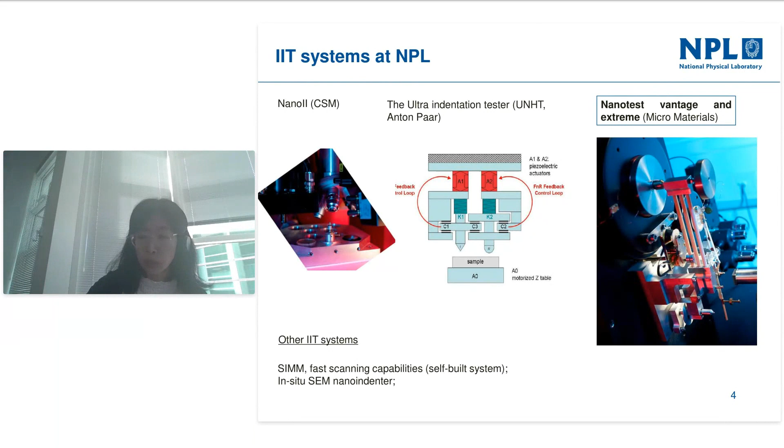As for today's focus, the NanoTest system for the Xtreme, the NanoTest Xtreme with multi-head, we will focus on this system. With the above setup, the instrumented indentation test research activities in NPL include the following two parts.

So the second part is to develop new techniques, such as exploring new applications of the instrumented indentation test regarding industrial needs. We carry out research work with direct links with industry and universities, and with access to the ICM suite and microstructure characterization, we test a set of materials and formats of specimen for the instrumented indentation test.

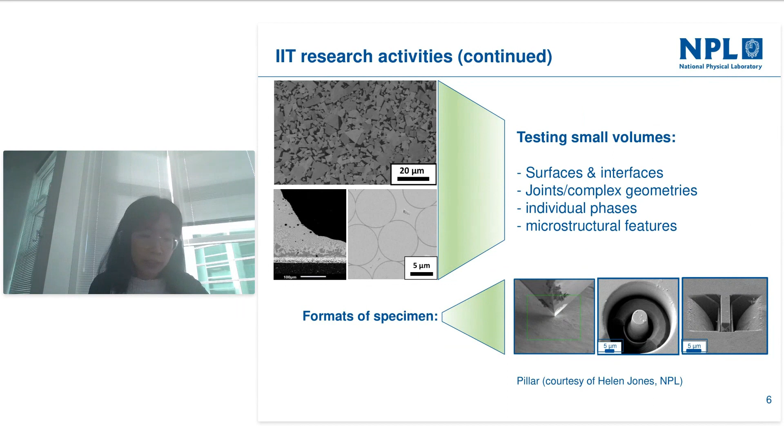And for the detailed setup, for instance, a high spatial resolution of about 1 nanometer with nano positional control, and a wide range of temperature from cryogenic to high temperature of about 1000 degrees C that we are testing at the moment. It gives us options from atmospheric pressure to high vacuum, and also inert atmosphere with backfill of argon or nitrogen. We have tried routine tests for hardness and modulus, and are also exploring new test capabilities, for instance yield strength, fracture behavior of materials and creep properties.

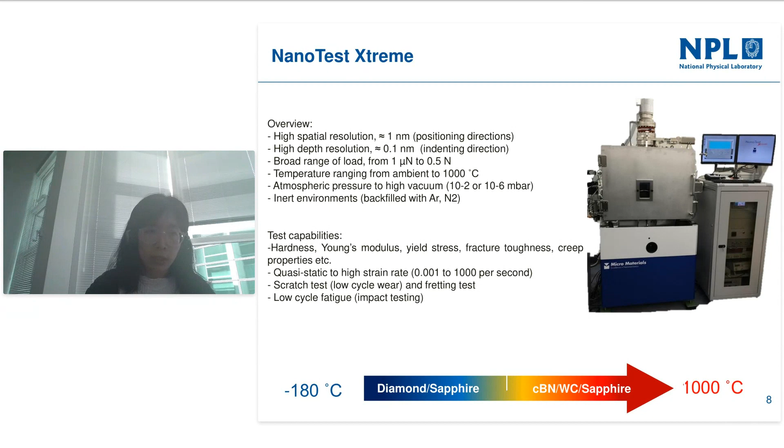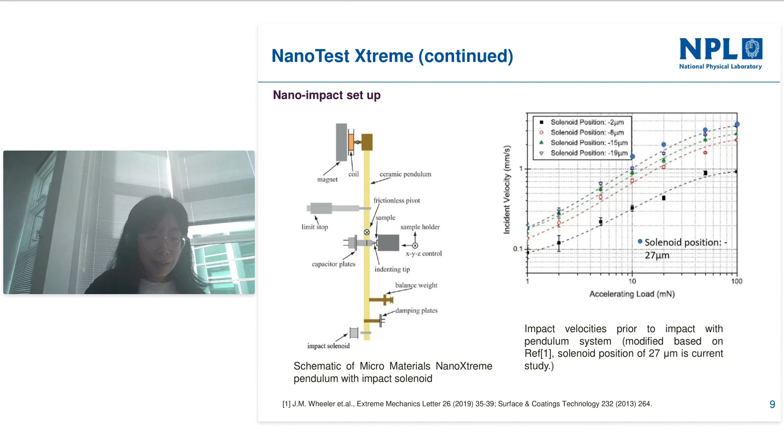More details about the application of nano impact will be discussed later in the case studies. And my colleague Peter Williams also made a video about this. If we have time, we could play it at the end, about the micro impact test on fused silica.

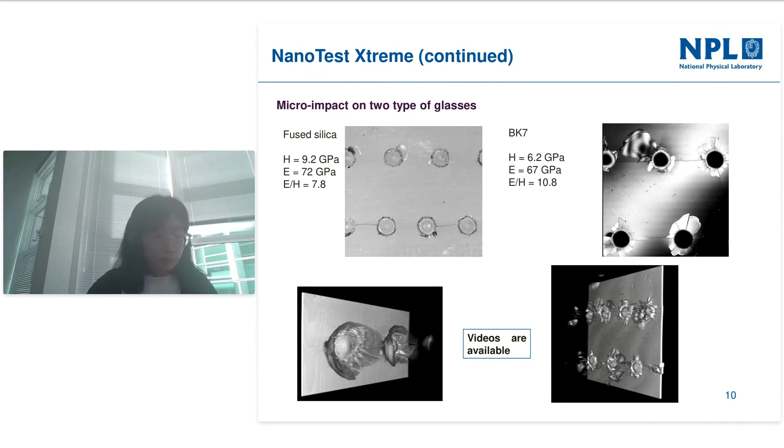There are more details about the nano and micro scratch test in the CEN standard, which was developed recently, led by my colleagues. And in addition to the images observed after the test, the record of the scratch pass, topography, and the friction force gives a matrix of parameters to characterize the coating wear resistance.

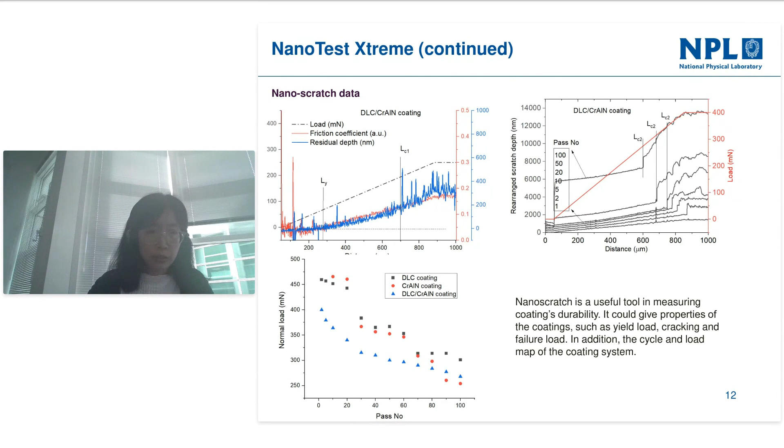So the simulation is consistent with experimental observation, and it indicates that the coating adhesion can be improved if the interface is only overloaded from the coating side.

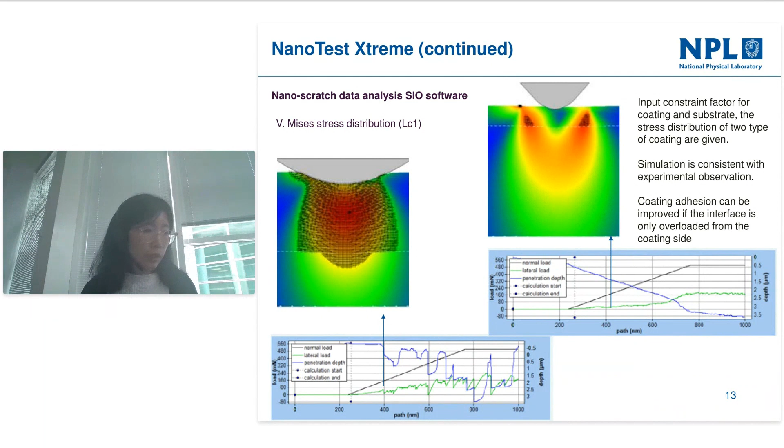First is the temperature mismatch or thermal gradient between where the sample surface is and the thermocouple location. And the same for the indenter side, we couldn't put the thermocouple close enough to the indenter tip. And the second challenge is to establish the isothermal contact, which would lead to the thermal drift, and the last one is the system compliance of both systems.

High temperature testing has a few decades of research to improve the thermal drift and also to calibrate the compliance of the system, while cryogenic testing has recently attracted attention due to the drive of the hydrogen economy. So instead of high temperature results, here are some preliminary results from cryogenic tests.

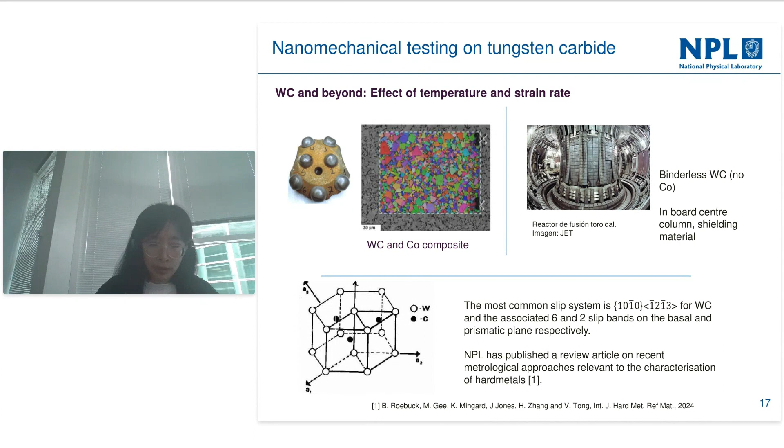And we did a lot of analysis for single crystal tungsten carbide regarding the surface defects. As plastic deformation is believed to occur by the glide of pre-existing dislocations, whenever the stress field is large enough to trigger the dislocation motion, the pop-in could occur even during the unloading process.

By reducing the indenter size, we were able to get a consistent load at which the pop-in occurs, which was further calculated to be quite close to the theoretical shear stress necessary for the homogeneous nucleation of the first dislocation loop, as shown in the following details.

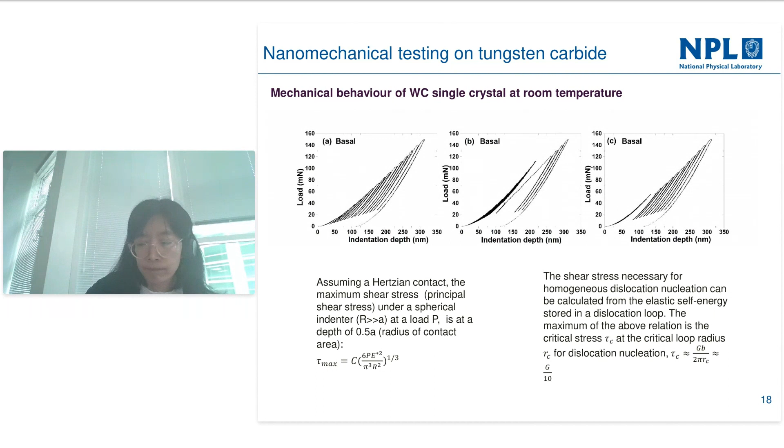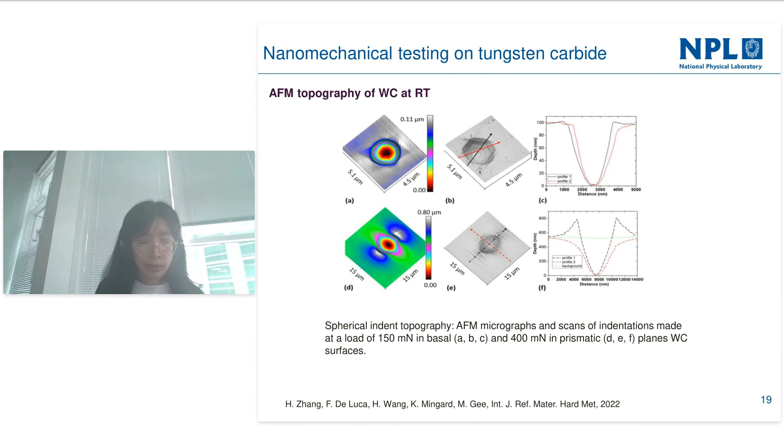In addition to the AFM scan, we have also done ECCI, electron channeling contrast imaging, on both the surface and cross section of both the prismatic and basal planes before and after the indentation test. And you can see these dislocation slip planes are quite consistent with the AFM observations of 2 and 6 fold.

The cross section of the prismatic orientation shows the impact of the different slip planes, which form an angle of about 120 degrees. And for the basal plane, you can see the dislocations mainly glide downwards along the 1010 plane system. So these are the quasi-static load results.

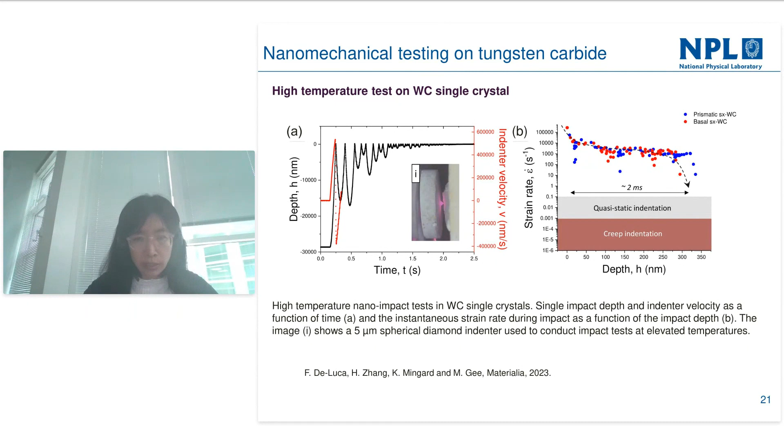So the impact test is carried out at up to 600 degrees C here, and we will compare the results with quasi-static at similar temperature for both grains. To mention, for the nano impact test, we used a spherical indenter with a radius of 5 micron, a pendulum acceleration distance of 25 micron, and an acceleration force of 5 millinewton.

And with the recorded displacement data with time, we were able to calculate the velocity, which was used to calculate the dynamic hardness according to the energy method here, without including the work of the acceleration force, because the depth recorded during the first bounce is not purely a plastic response.

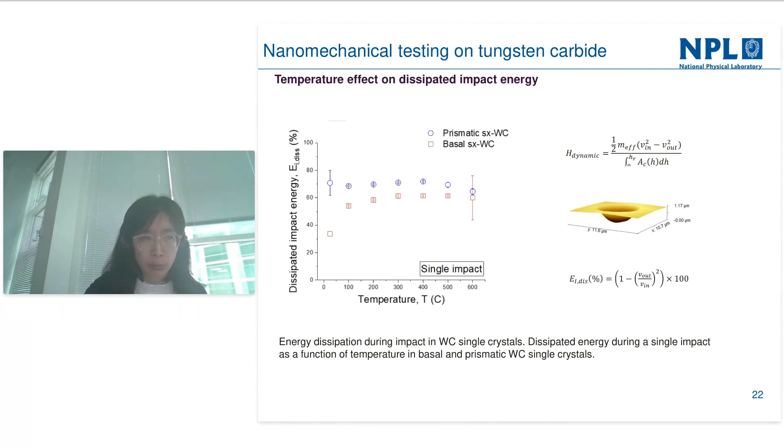The difference between quasi-static hardness and dynamic hardness is not very clear, but it could be from changing of the deformation mechanism, and also we observed for the impact test on the prismatic grains, when temperature is above 200, large plastic deformation was observed.

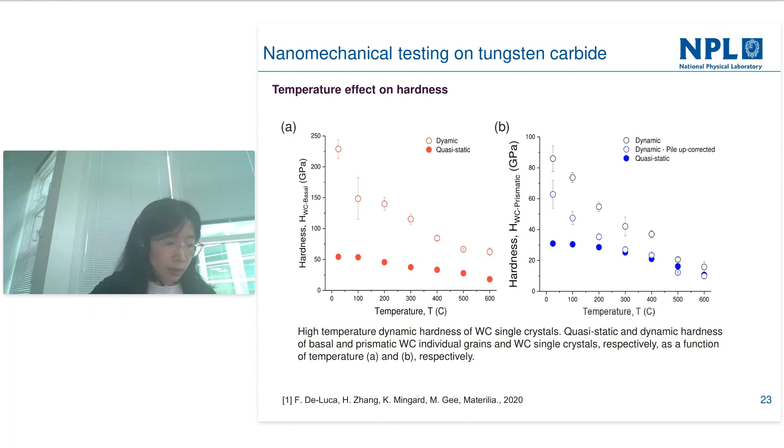We also checked the cross section of the two grains after impact test, from both quasi-static and impact test modes. We checked both surface and cross section ECCI images, and we could see they show similar dislocation patterns and slip planes, which shows the deformation with high temperature is carried out at higher strain rate. So that's the summary for the tungsten carbide test.

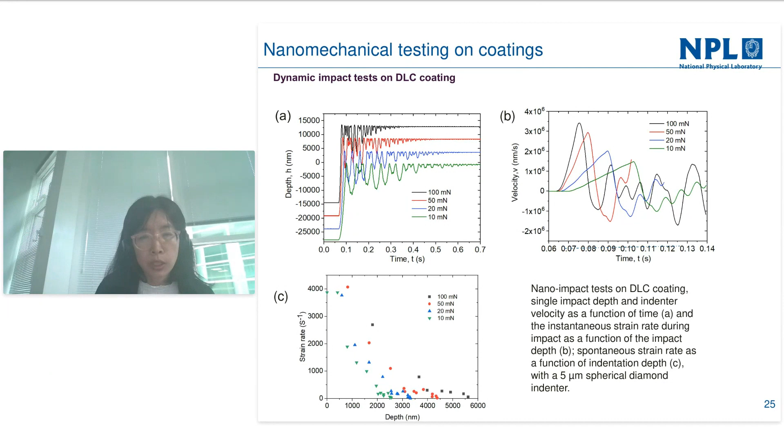As you can see, the maximum velocity increases with the load, and we further calculated the instantaneous strain rate for the acceleration loads, and similar to the velocity, the strain rate increases with increasing acceleration load. By doing the multiple impact test, we found that we could map the coating's property with the load and also the impact cycles.

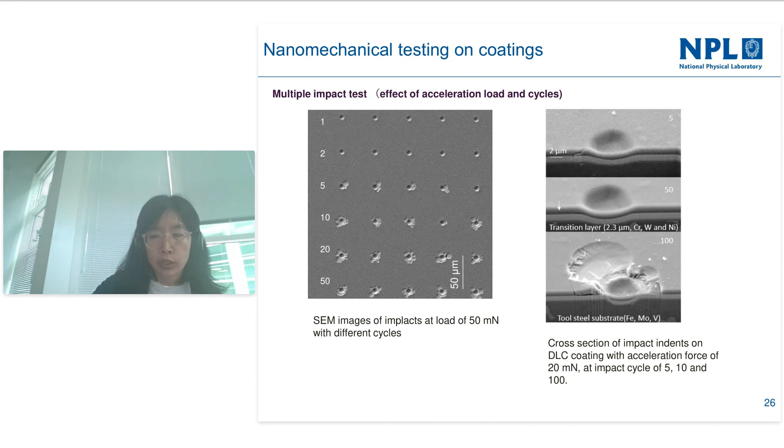So the left side is the SEM images of impacts at loads of 50 millinewton with cycles from 1 to 50. And you can see the coating starts to fail at about 5 cycles. On the right side is the lower acceleration load of 20 millinewton, and you can see the failure of the coating started at quite a later stage, and there is a plateau with the load and cycles, which you can see from this load depth profile with impact cycles.

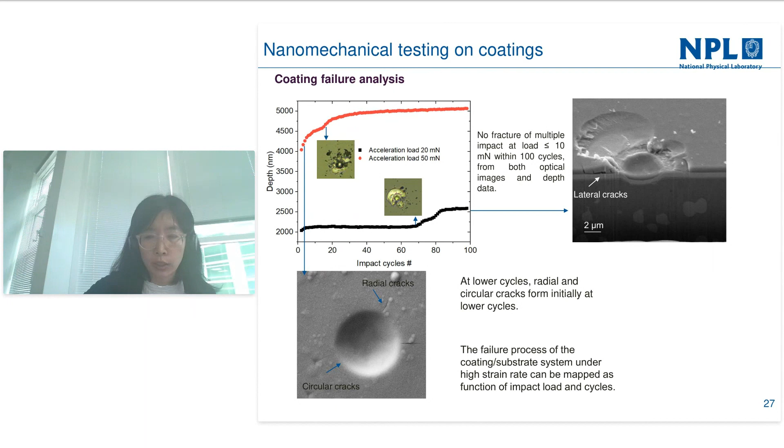So here you can see a large jump of the impact depth, which corresponds to the failure of the coating. Before that, for the acceleration load of 50 at less than 10 cycles, you can see radial cracks and circular cracks, but this doesn't lead to the sudden jump of the displacement. While for the 20 millinewton, the depth stayed constant until quite a high number, here 70 cycles. So from this observation we conclude that it's possible to map the coating's durability as a function of the loading cycles and the acceleration loads.

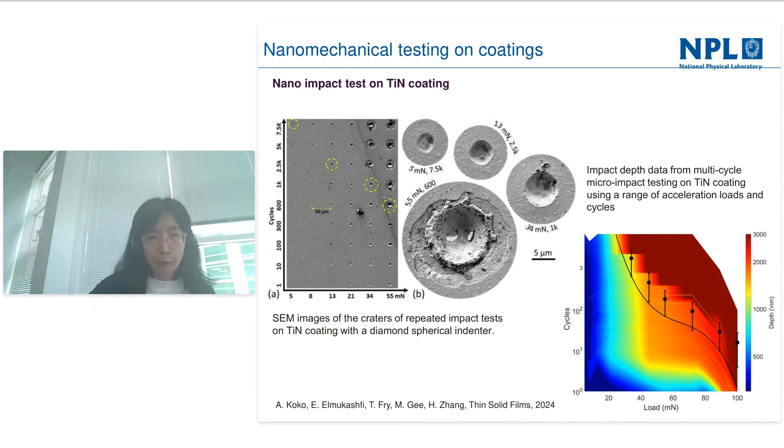With that, we have come to the summary for the nanomechanical test on coatings. Here, I want to emphasize that the nano impact test has great potential to be used as a standard tool in coatings screening and optimization, where coating durability is tested under interrupted contact situations, such as metal cutting and erosion.

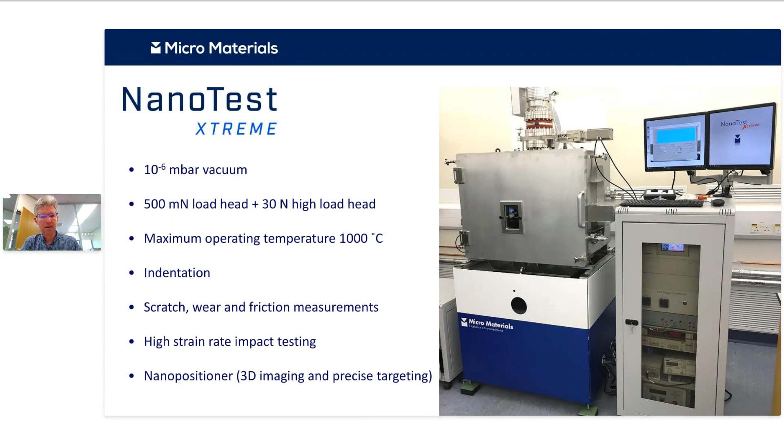And all of these things can be done in conjunction with our nano-positioning staging, allowing us to image and precisely target the features. And a lot of what Hannah was talking about was being able to target specific grains in the tungsten carbide, and that's all achieved because it's possible in the nano-positioner in the system.

So why are we using vacuum in the first place? Well, it's to eliminate oxidation on the tip and the sample side. So diamond itself will graphitize in air above about 400, 450. It's relatively slow if you're not heating the tip, as you don't necessarily need to heat the tip for impact experiments, then as you can see with Hannah's talk there, you can go to a little bit higher temperatures and still use diamond.

But otherwise, we do use different indenting materials for testing other materials in indentation testing. So the vacuum allows us to go to higher temperatures compared to the environmental control in ambient or gas purge chambers that we also offer in instruments like our NanoTest Vantage.

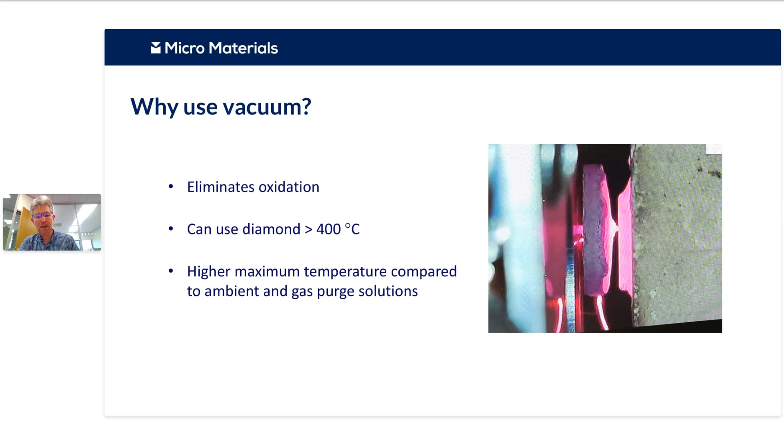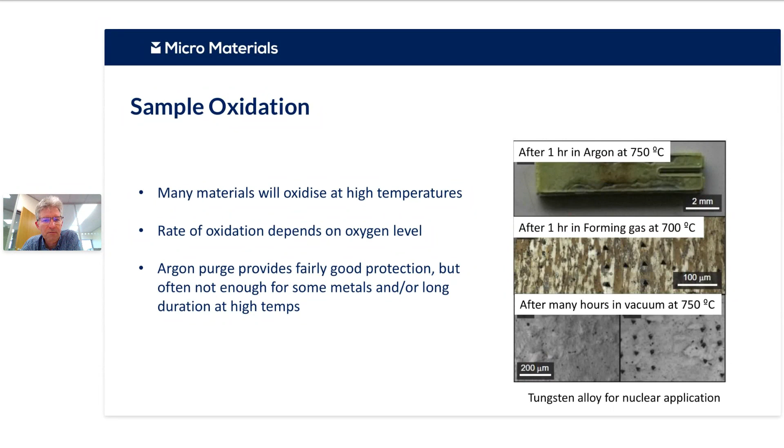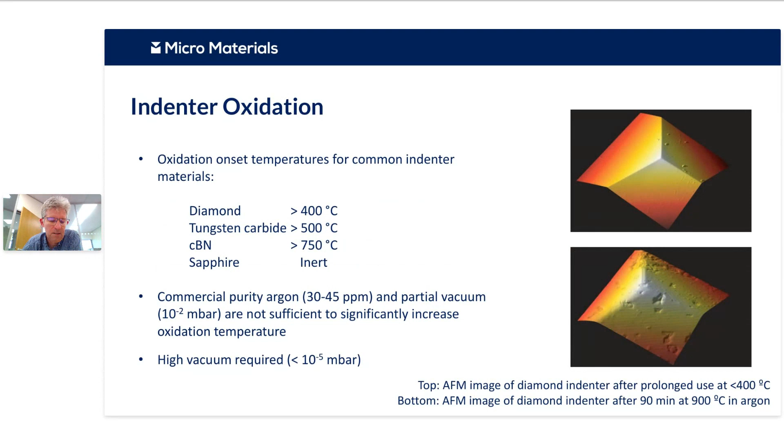So that really limits the ability to use these things as reliable high temperature indenters. You need to recalibrate quickly. So to fix this, you can use these high vacuum conditions that you can achieve in the NanoTest Xtreme system.

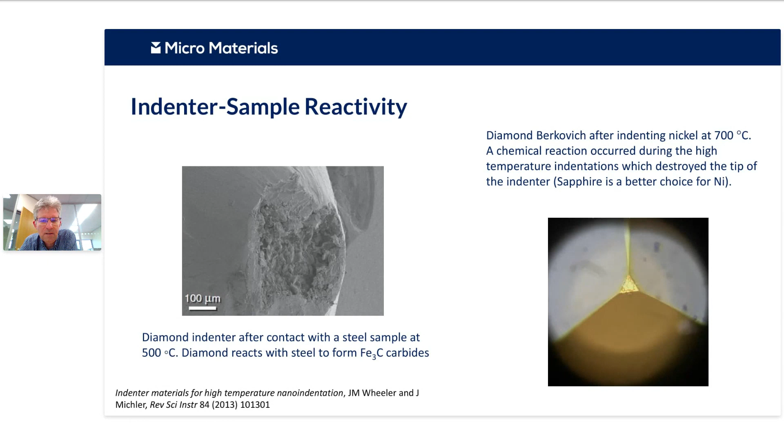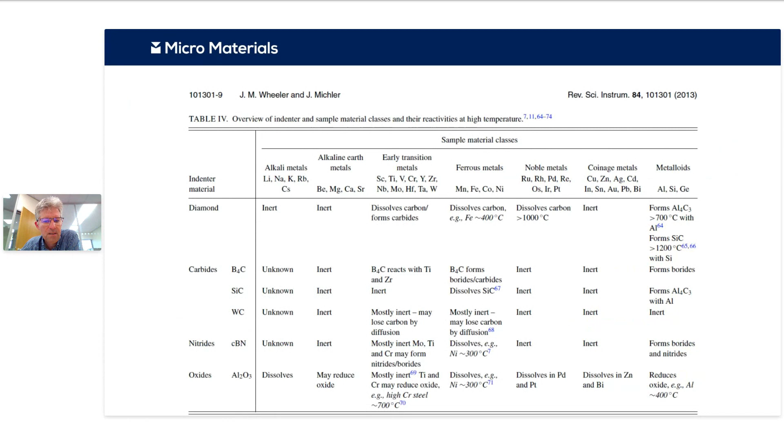So there's a little bit more about this. I recommend this review paper. It's quite a few years old now. It's not absolutely perfect, but it gives a very good guideline into the type of reactivity that you might encounter in the materials choice that you might want to use. And we typically offer different indenter materials, be it sapphire, cubic boron nitride, tungsten carbide, or diamond, to allow you to test the widest range of different materials at these high temperatures.

So as I think Hannah said, we've been doing high temperature nanomechanics at Micro Materials for a long time now. And relatively recently, this high temperature publications note has been put together and updated just this year. So this has a list of 76 of these different publications covering a wide range of different material types. And that can show particularly how you can do reliable measurements, understanding the tip-sample chemistry as well and the environmental control.

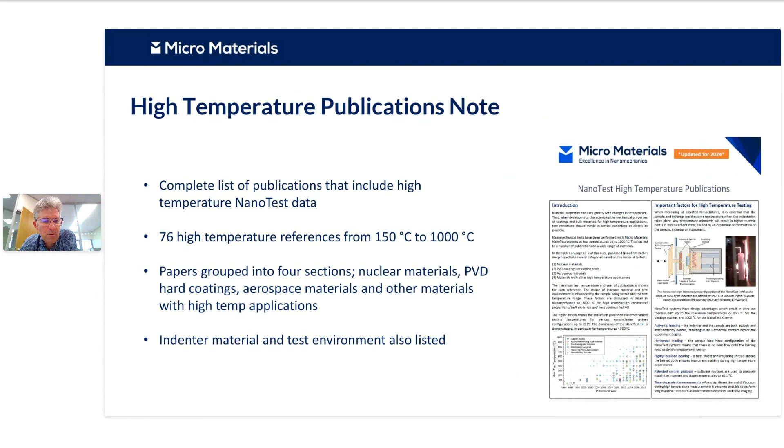So it's a popular system now, the NanoTest Xtreme, for high temperature vacuum nanomechanics, particularly going to very high temperatures, but also, as Hannah showed, interestingly now this extension to very low temperatures as well to extend the range of the instrument. A lot of this is achieved through having this very high vacuum level to eliminate the oxidation and, at cold temperatures, the icing.

And we didn't really talk about it, but one of the key advantages of this system is this isothermal control by active heating of the indenter and the sample. It really gives these ultra low thermal drifts that give you reliable results at very high temperatures, particularly where you get a lot of indentation creep happening in many materials. So you really do need to get a good handle on the thermal drift and minimize it so your results are reliable.